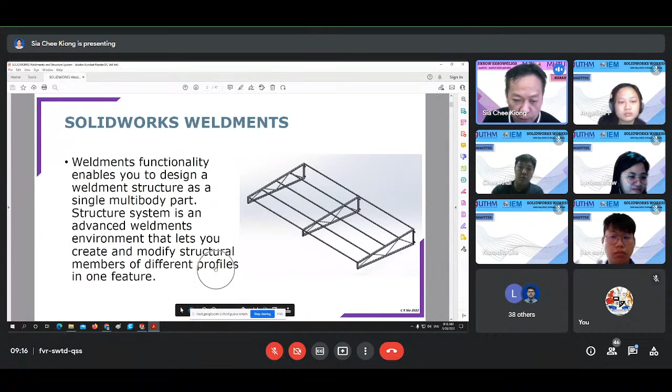So this is the project I mentioned just now. Instead of designing some things, we can come up with a cut list. I think this is very important for the procurement engineer, to list up or stock up all the necessary raw material for the project, maybe for early shipment before the project begins.

If you use this method step by step, I believe after you install your own SolidWorks, you can at least create something simple. So try to compact it down like this. So actually for the weldment step by step here, we will focus on this, which I circle with this red circle, focus at this 5 step.

For the weldment, we can create the cut list, which I mentioned earlier, and then we can estimate the weight of our products, since we assign the material for each product, which has properties like the density and the volume of material. Then we can come up with the overall weight estimation.

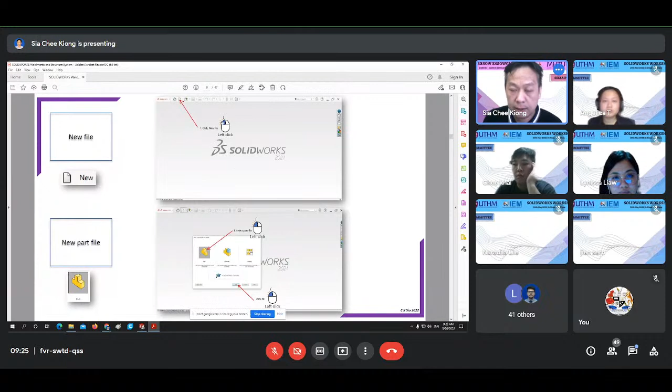I stated the steps clearly - even which key should you click? Should you click? Okay, which key should you click? So until now, we open the new file.

Take time to load. All right, okay, this is the environment of it.

Then we will start to sketch. We will sketch this profile, this line. We start to create this line over here, like this.

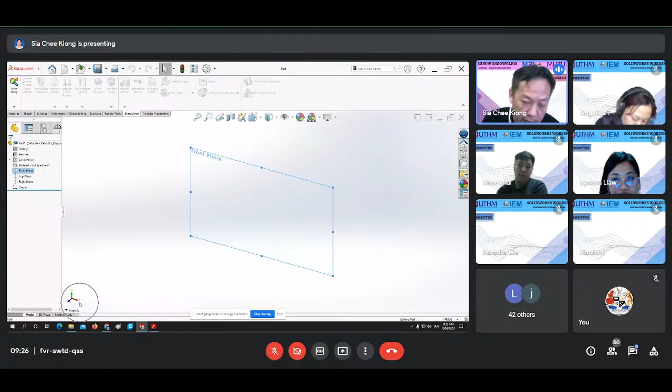So before we start with our sketch, I would like to let you know we only can sketch at the flat surface. The flat surface means either plane available here - you can sketch from the front plane. It's a flat surface because this plane is located parallel to the X and Y axis. Between X and Z axis, and for the right it's Y and Z axis like this.

So we will sketch this according to this dimension over here. So let's say if I want to start from the right plane, it's quite simple.

You just right click at any plane that you want. Let's say I want to sketch on the right plane here, I just right click. When you right click, two small windows will pop up like that - a smaller one and a bigger one. Ignore the bigger one, we focus on the smaller one here.

There are 4 toolbars available there. If you don't understand what a toolbar is, you can move your cursor to each toolbar and there are explanations about the toolbar. For example, I move it to here, it shows.

The first one is sketch, so we select sketch because we want to sketch on the right plane. When I click sketch, the orientation of our view, which was in isometric view, after I start our sketch, the right plane will turn normal to our screen to make it easier to sketch.

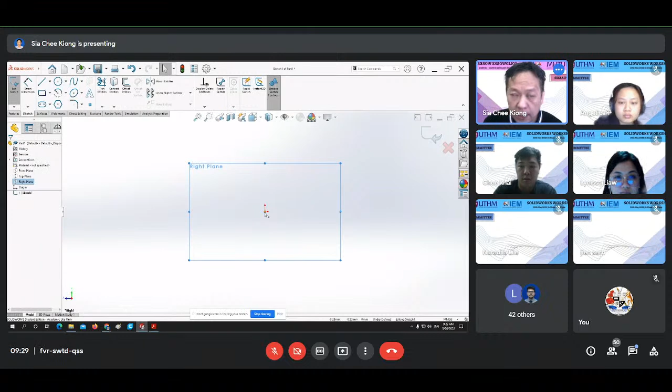So every time when you start with any sketch, I recommend you to start from origin. It doesn't matter which side you want to start. Why do I say that?

You can see, for example, if I create a circle, then I still can move my circle anywhere I want. I hold it and I can move it any way I want.

But let's say if I move my circle, and the center of the circle is located coincidentally on this vertex, that means my circle will stay there - it cannot be moved, but we can only change the size of it.

That's why every time you start your sketch, it's better to start from the origin. So we start this one. To sketch this one is quite simple, the method is very simple. This is a straight line, because I sketched it out using freehand, like a curve.

This is the command for the line. When I click this toolbar, but before I start, you can see the shape of my cursor. This is a normal cursor, white color, normal cursor. But when I activate this command, the line command, you can see the difference. My cursor turned into a pencil, and just below the pencil there's a straight line, meaning it's ready to sketch a straight line. We start it from the origin.

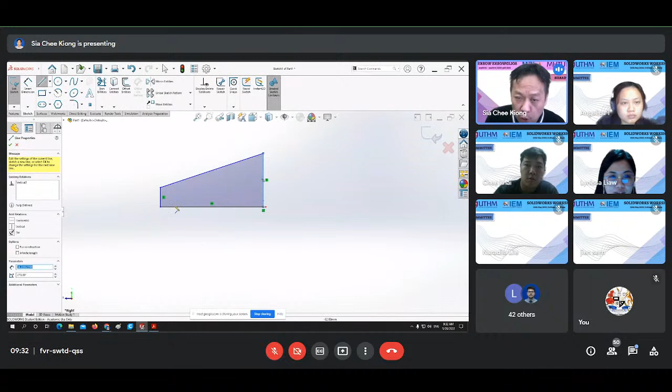Second click, third click, and cross the sketch, okay, like this. Very simple. After we finish with this geometry, this is the outside of our area. We can proceed with the inner line here. Please sketch it like this. Remember, just create the overall shape first.

It's so different, because there's no dimension yet. We haven't put any dimension. After we set the dimensions, then you can realize the real look of our design.

Okay, so until now we complete our geometry. This is actually the part for the awning, for the awning, this one.

After I finish with the geometry, the status of my sketch is still underdefined. Underdefined in SolidWorks means we can still move it, and we can still change the size or the shape. For example, when I hold this endpoint and drag it, the shape can still change. The reason it can change is because we lack something here, known as dimensions. We need to insert the dimension to make sure the status of our sketch is fully defined. Right now it's still underdefined.

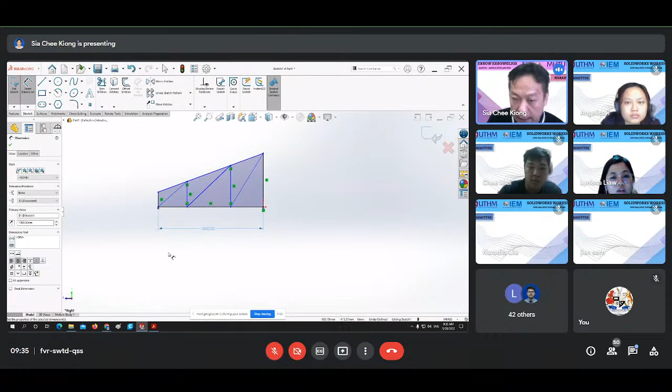Then I just change the value into our value, which is 1000, then we click OK. It's as simple as that. So currently, the length for this bottom line is 1000 millimeter, which is what we want.

Then the rule is simple. Every time when you insert the dimensions, I recommend you to insert the highest value first. For this case, the highest value is 1000, so I pick 1000. Of course, it's not written in any books, but this is based on my experience. Otherwise, the shape will change.

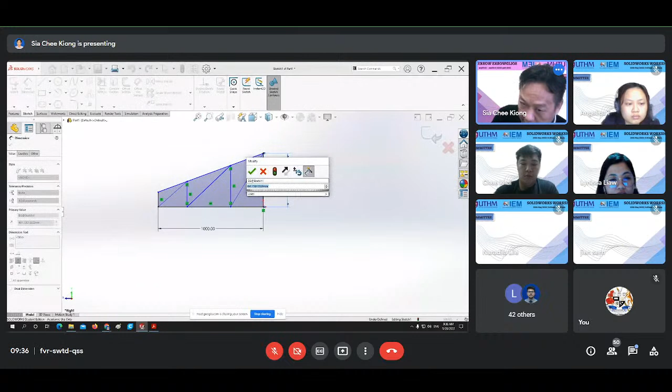Then the next one is 300 on this side. Very simple, we just change the value like that. And for this side it's 100. So click on the side, it's 100.

Okay, how about the inside? Just now I picked the line, meaning I measured the entire length of that line. How about the distance between this point and this point? We can do it easily. We can select the point that we want to measure. Let's say I want to measure here, and I click at another point that I want to measure, like this.

So this is how we do the dimensioning on this part. And the dimension is 320, we just change the value to 320 millimeter, like this.

Then we try to complete the sketch, try to complete the dimensions. This point to this point is 320. So when everything is ready, try to rearrange the dimensions.

It's very important, because people know whether your work is tidy or not. Try to arrange it. You can move the dimension anywhere you want actually, you can move it here or wherever. So try to arrange it like this.

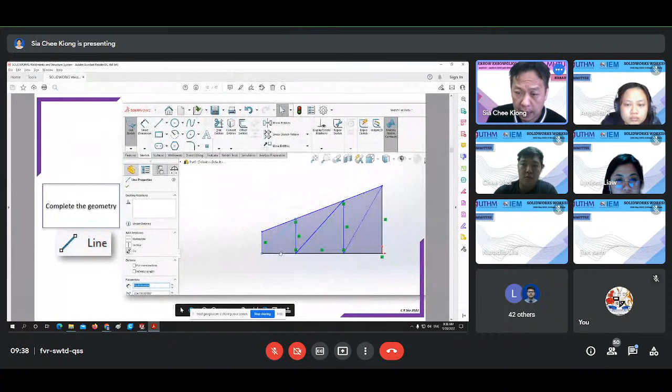After I complete with these dimensions, I will call out the Weldment tab. What is the Weldment tab? Let's say I cross this Weldment tab.

I cross this Weldment tab. Not all the tabs are available. So this is the tab that is available here.

Start with the features. This is what we call the tab, and this is the toolbar. For each tab, there's a different toolbar, for each tab there's a different toolbar. Okay, for SolidWorks.

Now we will play around with the Weldment tab, the Weldment situation. I'll show you how to call or add the toolbar for the tab for the Weldments.

Just select any tab here, any tab, and right click on it. Just right click on it.

And go to the tabs here and just check on any tabs that you want. So now we will run Weldment.

Check on the left side of this Weldment here. Then the Weldment will... here.

This is for the Weldment. So when I click on the Weldment, this is the home toolbar for the Weldment.

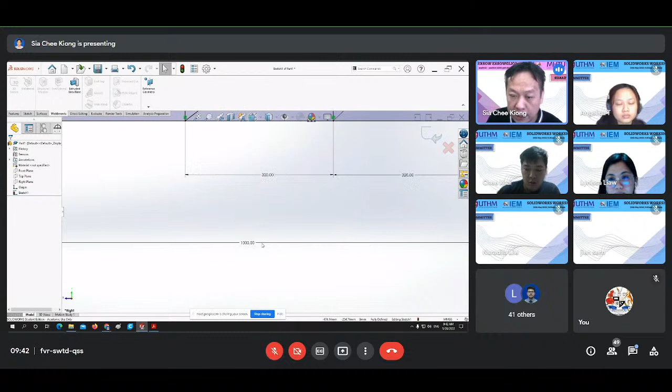But for my SolidWorks, I purposely set it to 2 decimal places, meaning the product I design is an accurate product.

So back to our standard here. Inside of this standard, this is the file for this standard here. See, we've got the C channel.

Check how the C channel looks like. And this is the S sections.

Angle iron, rectangular tubes, and square tube like this. And it's available in a lot, many dimensions, okay.

So for the civil engineer, maybe you need to determine the second moment of area for each structure here. But don't worry, because SolidWorks already calculates it for you.

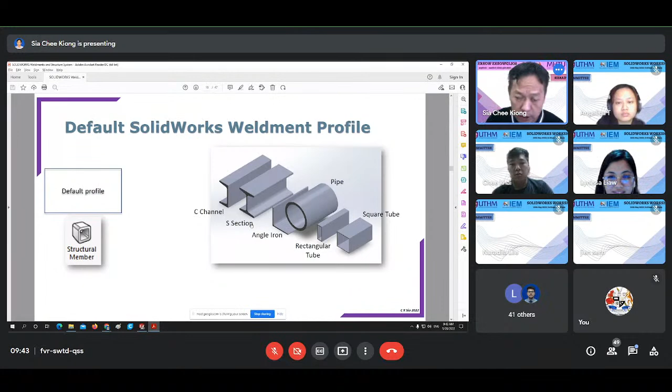For the electrical engineer, don't worry, because you can customize your own profile. Okay, maybe you want to create a 3D printer using a 3D printer, you can create your own structure, your own profile.

You can create your own profile like this. Or maybe if you want to create the rail for the movement of your motor, create your own. Customize your own profile - it's very common for you to create your own profile.

Not only the shape - I purposely created this shape like this because I don't want to take the shape of others. Maybe there's an issue of copyright, so I created my own part.

So this is the step of how we customize our profile. I will not go through this - I can simply go through this profile, so I'll just leave it as this one profile.

But if you follow this step, you can create your own profile. So continuing from that, we still use our example.

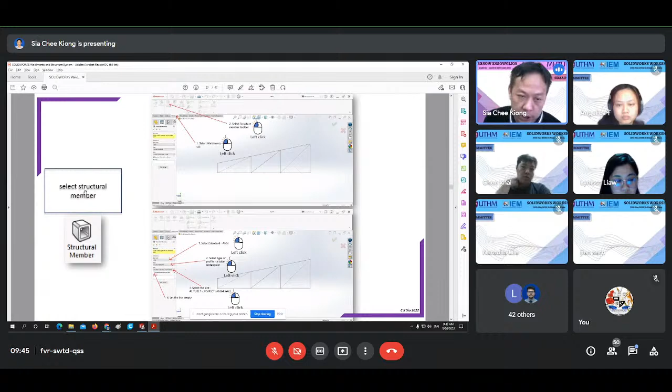Then the next one is we will select the structural member in our design just now. Our design,

we will design this part, which is created from the 1 inch by 0.5 inch rectangular tubes. So we will use this profile for this structure, and we follow the step.

Okay, so we go to the Weldment tabs. But before I can make sure this command is active, I need to cross out this sketch first by clicking this button here. When I click this button, the command for structural member will turn into an active command.

We start with the structural member. This is the structural member, and this is the properties manager for this structural member. Start with ANSI - this is the standard that I mentioned just now.

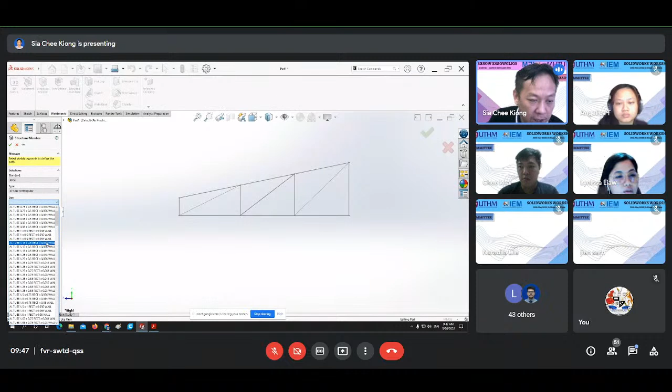The type is tube, rectangular tube, and the size is 1 inch times 0.5 inch. So rectangular, times 0.064 - this is the thickness of the wall.

So it's very easy to create structure. Even if this is your first time, maybe your first time exposed to SolidWorks, you can use this method. Very simple.

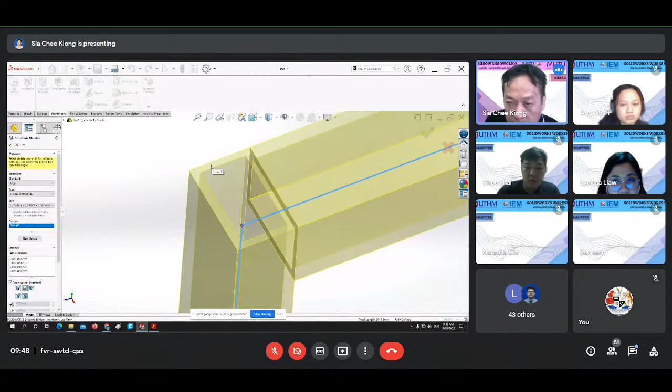After I select the desired profile, I just click the outside or outer line here. Click this line, this line, and this line. Then the line here will turn into the profile that we sketched and selected, which is the rectangular tube with dimensions of 1 inch times 0.5 inch, and the thickness of this wall is 0.064. So you can see how it looks like - it's very simple.

After we complete this, we need to create the second group - the new group. And we use the same profile, continuing to create the rest of the line here.

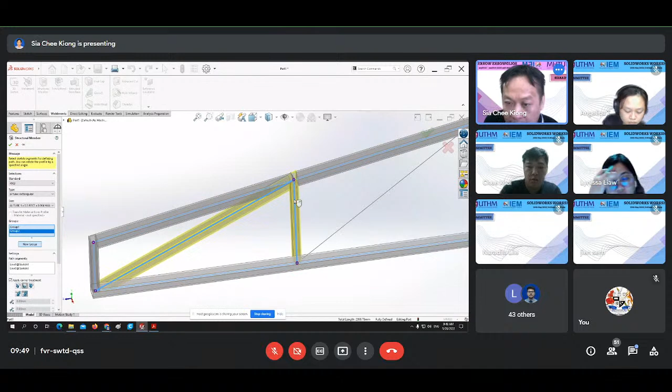Bear in mind, when you select the line, you must select it in sequence. You cannot select this one and then jump into another one, because when I click on it the profile will not appear here. You need to continue in sequence from here. Since the line is joined here, you can click this line and then the profile will show up.

Then select any line that joins this profile - select this line. I will try to complete the selections like this. When everything is ready, I can click OK here or OK over here.

So this is our overall structure. We can even view it in cross-section view, so I can see how the inner part looks like using this section view. It's very detailed.

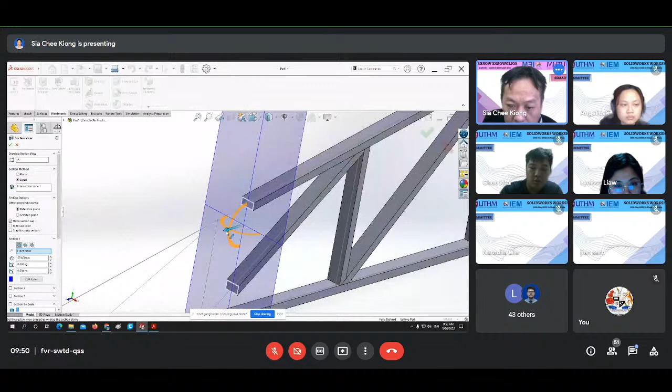Maybe I want to see the intersection between these three points - it looks like this. Simple. Pull it - okay.

But when we turn into the production process, we consider the material and the production process. For example, when you cut the corner here to look like this, maybe it's difficult compared to this line. You can pick any treatment or type of shape that you want, like this, or this, or this.

If you ask me, I will prefer the second one. Maybe this structure will have a better strength - this is my opinion.

If it's like this, there's an open hole, it's exposed. But for this one, it's still open but in the side way. This one, everything is closed - if water goes inside, there's no way for the water to go out. So I prefer this one.

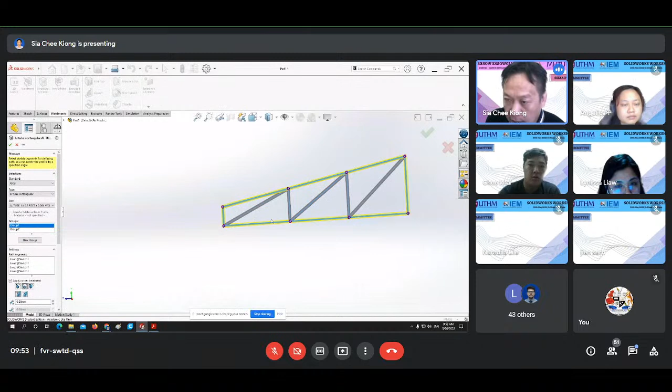Each dot represents the join between each structure. This purple dot here means it joins this structure to this structure. And this dot represents the join between this structure and even this structure as well - three structures joining into one point like this.

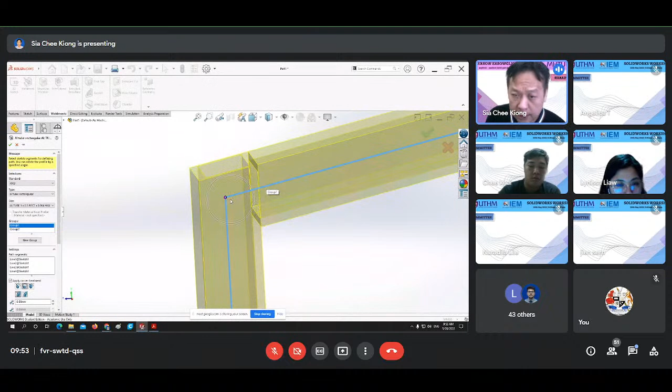So how can I change it? I just simply click at this dot or any location that I want to change. Just click on the dot and you can select the shape of corner that you want. For example, if I click the first one, it will change like this. The third one here will turn like this - it's very simple. So I want it to look like this, then I can click OK.

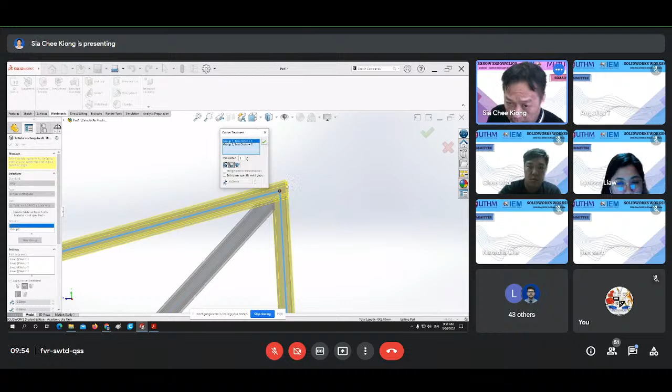Now, how about this one? This one is okay, but if I want to change it, I can. For example, I want to focus on this diagonal direction, which is this structure where we have come to here. Just change the trim order, and it will look like this. I think for this corner it's okay.

Like this. The last one, pick it and change it until it looks like this. So if the corner looks like this, it's easier for us to produce or cut the structure. The structure is easy to produce and easy to weld as well.

Okay, after everything is ready, we can click OK here. This is our structure. It's complete with the corner that we want.

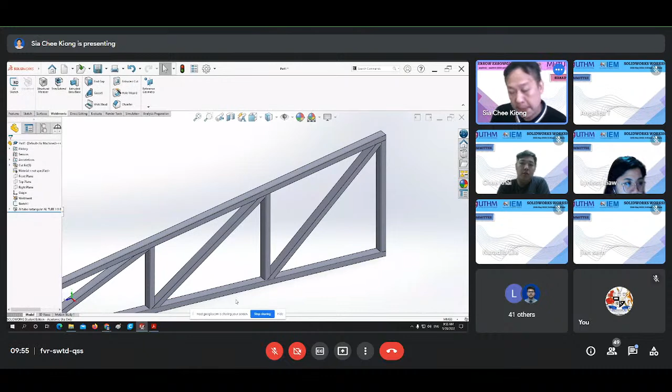Corner that we want. Maybe we can change here. Here, I am not happy with this joint. So click here, then I can order it like this. Okay, click here.

Yeah, like this is better. See? Better. Okay. This corner, okay, this corner is nice. This corner is not good, change it again.

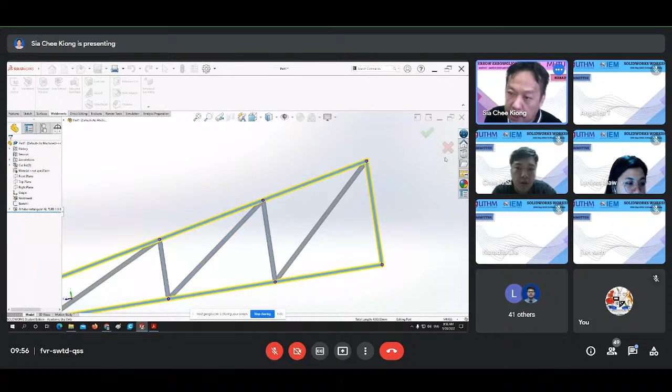You can change each corner, but it's okay, and this one is okay. When everything is ready, we can click OK, and our design looks nice.

So the next step, our structure is complete. Now our structure is complete. And of course, for this structure, we need to add an additional pad behind it, because we need to fasten this structure on the wall, on the concrete wall. We need to add an additional pad.

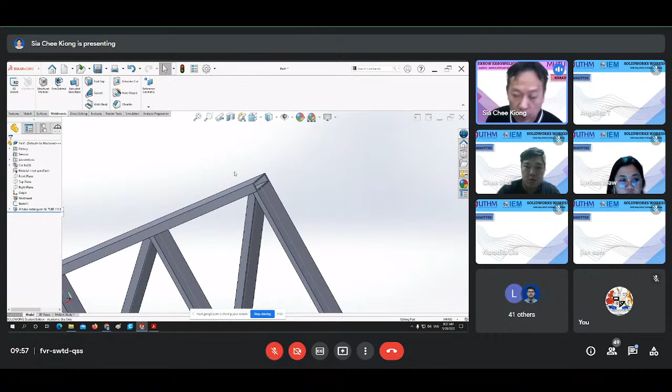So now we are not using this structural member or weldment approach. We will use the common SolidWorks 3D method to create the plate. I will create the plate with dimensions of 50 millimeters by 50 millimeters, and the thickness of the plate is, let's say, 5 millimeters.

So for your information, in SolidWorks we can sketch anything, but as I mentioned earlier, we need to sketch it on a flat surface, on a plane. Even we can sketch it on this surface, on this face.

Let's say if I want to sketch something on this surface, I just click on this face and select the sketch toolbar. This is the sketch toolbar, like this. If I want to sketch here, then I click, and you can sketch on this surface. Even we can sketch inside as well, everywhere, as long as the surface is flat.

Okay, so I'll try to sketch here. When I sketch, you can see the surface will hover to the screen to make it easier for us to sketch. Now the next step is simple.

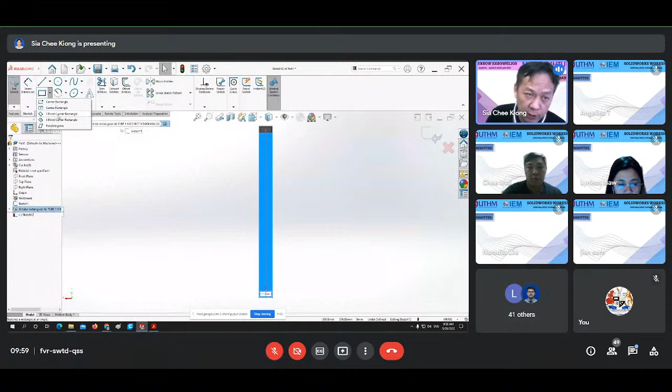I will use corner rectangle. Just now our sketch tool was line, but now I will be using corner rectangle. When you expand this command, there's a variety of commands for the rectangle, but I will use corner rectangle.

You can see the cursor looks like a pencil with the corner rectangle icon at the cursor. So I will sketch exactly on the edge of this surface. SolidWorks provides feedback when you move near any entities like a surface, edge, or vertex - it will auto-relate it to you.

Let's say I want to sketch it here. Fine, click it, and then drag it, like this. Okay, so after I create the geometry, then I need to insert the dimensions.

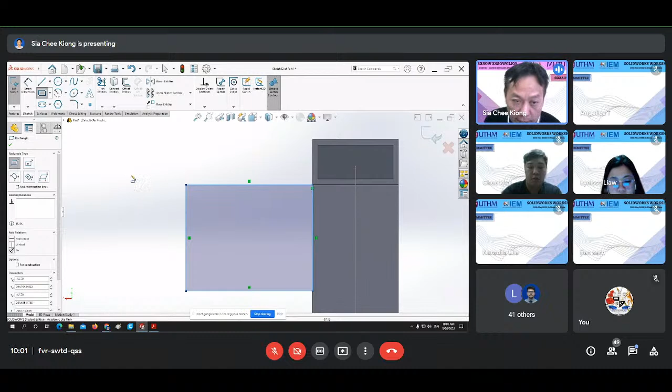If not, our status keeps underdefined. As I mentioned, the size is 50 by 50. To complete, I will try to sketch it at the top and the bottom like this. Oh yeah, before I forget, how I control this view - I just scroll my mouse up and down, so it will provide the magnification.

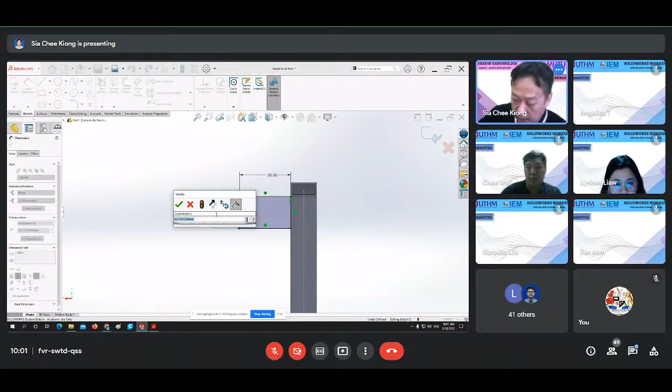Then I will insert the dimensions for each side. This is the command for smart dimensions. 50 and 50. And 50, and we try to complete for both rectangles - 50 and 50.

Okay, so we are complete now. We are fine because the status of our sketch is now fully defined.

Okay, proceed. But before I proceed, I need to create the hole for the wall plug. I draw a circle inside this rectangle for both rectangles. The size of the wall plug normally is a round number, like 10 millimeter or 12 millimeter in diameter.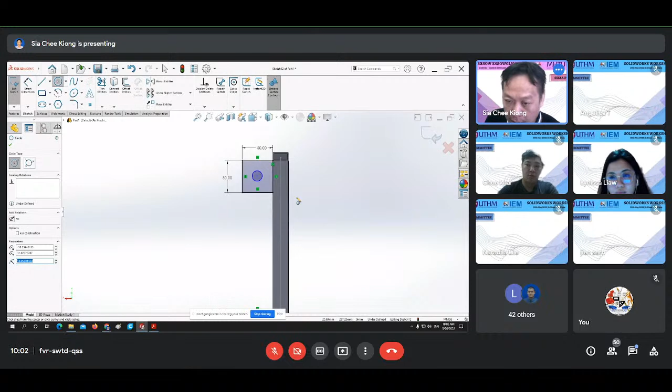So we try to give the dimension of the hole, let's say 10 millimeter. This is the size of the circle.

And if I want to locate the circle, I can use dimensions as well. Instead of sizing the circle, I can use dimensions to locate it. Currently our status is underdefined because we still can move the circle anywhere we want, even though it's stuck at 10 millimeter. It's movable, so we need to keep our circle fixed and locate it at the center of the rectangle using dimensions.

If I want to locate our circle at the center of this rectangle, the center should be located 25 millimeter, which is half of this dimension, from this edge. So I'll use this dimension to measure from this side to the center, like this, and change the value to 25 millimeter. And from the top to the center in this direction as well.

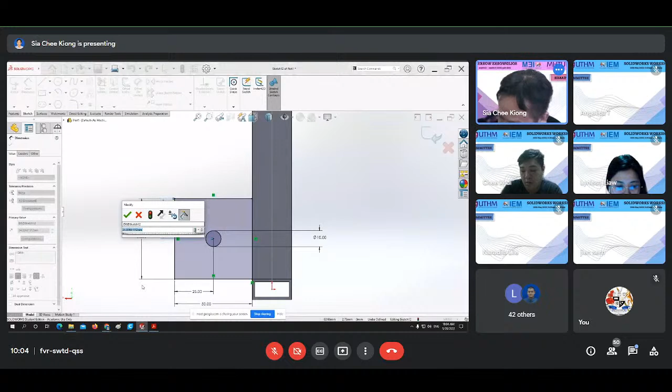Just now the color of the circle was blue, and it turned black after all the dimensions were complete. Still underdefined because we need to complete the same for another circle.

We'll do the same process. From the edge to the center, like this, 25 millimeter. And to the top, to the center, like this, also 25 millimeter. So when everything is ready, you can see it's complete with all the dimensions.

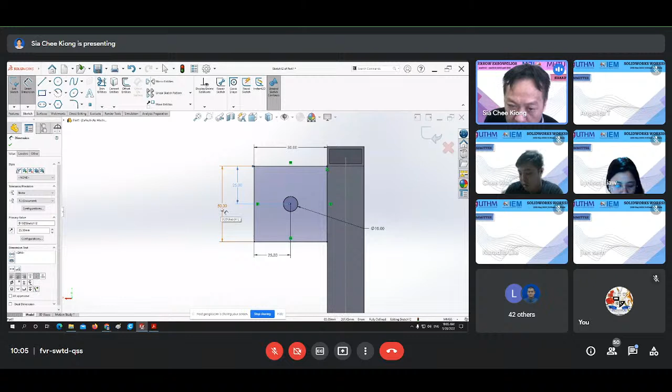As a reminder, you need to rearrange all the dimensions properly, so it's ready. Try to avoid any intersections between the dimensions - like this is not recommended, it's quite confusing. Make sure the shorter dimensions are located inside, meanwhile for the longer dimensions you put them outside like this. It's 10 millimeter, maybe here. Nice, okay, for this bottom one as well. Okay, fine.

This 10 millimeter, I can change the leader, like this. Okay.

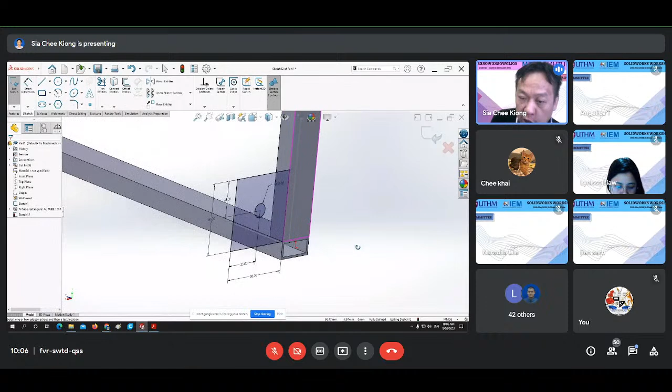So everything is complete, our status for this sketch is fully defined. But when I change the view, it's only a sketch, meaning there's no thickness at all. It's only a line for both circles, or for both geometries, like this. It's only a line, okay?

So we need to give a thickness for our sketch, which represents the plate that we want to create. To do that, we need to select the Features tab. The Features tab is normally used to create and edit the solid, create and edit the solid. So we try to give a thickness.

For the thickness, you can try to understand the shapes of the toolbar here. When you move over it, there are explanations - you can see the explanation, it even shows how to use this toolbar. For the revolve function, there's an explanation there too, showing the usage of this command. Very user-friendly actually, this software.

Okay, so we start with Extrude. When I click Extrude, you see the thickness for both sketches will appear. And what is the value of this thickness? Our aim is 5 millimeter, but currently by default it's 10 millimeter, so I need to change the value that we want, to 5 millimeter. Okay, now the thickness of our plate is 5 millimeter.

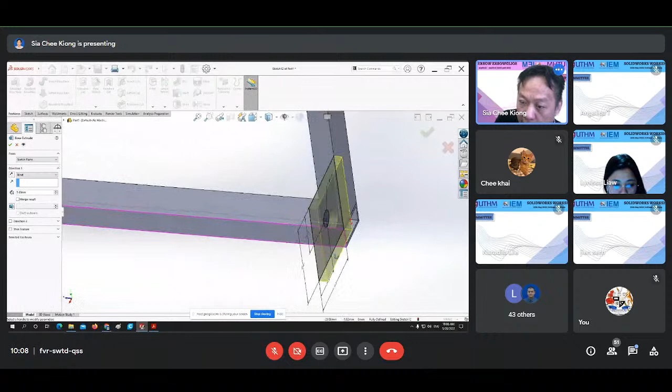But check the direction properly - if I turn it to look like this, the direction of the extrusion is opposite. We want the direction of the pull to the left, but now it's currently to the right. So what should we do? We just need to change the direction. I click this button to reverse the direction. It's very simple - when you click on this, it automatically turns into the opposite direction like this.

When you are ready, check again that our condition is fully defined, then you can click OK. This is the plate that we sketched. It's complete, it's complete, okay, it's complete.

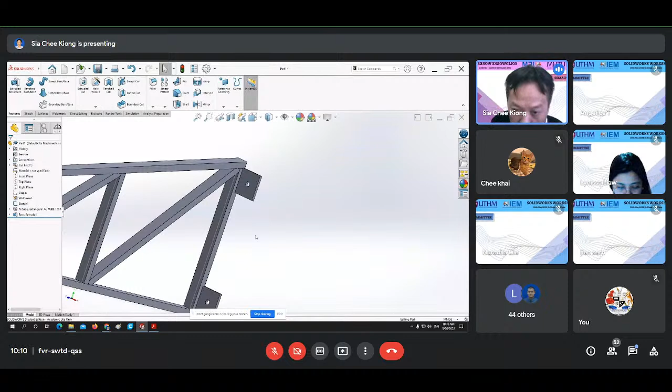Okay, then for the next step, I'll show you how to change the view into the standard view. Here are 3 methods available. The first method, you can use a keyboard. The second method is you can use the command, and the third one is a combination of the command and the keyboard. So we'll use the combination - hit the spacebar key on your keyboard.

This toolbar will show up, and this is the orientation that we can select, the view that we can select. This is the top view, front view, bottom view, and so on. This is the isometric view.

So like this, or you can use the command right here. Also the same, you can select it, any view that you want. Or you can use the shortcut key: Control 6, Control 7, Control 8, and so on. You can customize your own view, but I will not show you today how to do it.

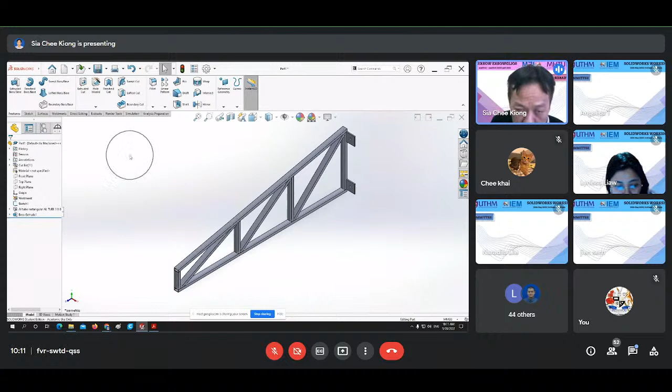When you scroll it, for example, when I locate my cursor here and scroll, it will move there. But when I locate my cursor here and scroll, it will move there. So if you get used to this mechanic, then you will be able to create the drawings easily and very fast.

When it's ready, we complete, and proceed with our next command, which is for information. Currently, we have not yet assigned any material for this structure. So try to assign the material, which is steel. I prefer to use this AISI 304 material.

To assign the material, you just need to go to FeatureManager Design Tree, and this is the material. Right click on this material and edit the material.

This is the material available in the database of SolidWorks. We have steel, irons, aluminium, copper, titanium, and so on. For the steel, we know it's a combination between iron and carbon, so we use this steel, and we use this AISI 304 material.

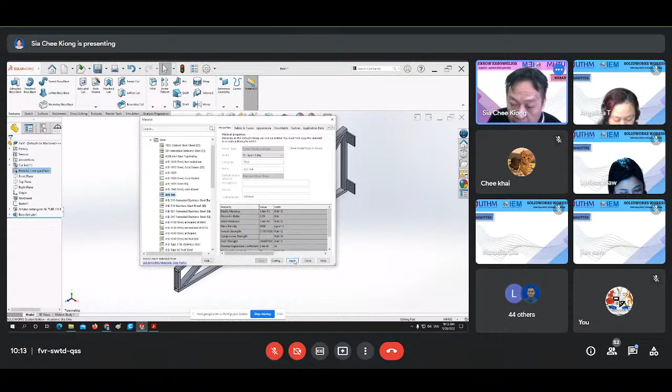Then you can just click apply, then you can close it. I'm not sure you realize it or not, but actually the color is changed. Just now the material was not specified; now it's turned into AISI 304. If you want to change the material, you can do the same process again. This is the example for the material.

After the material is complete, we will do the simulations. Since we have time, I will explain it more. For the simulation, it's simple. This is the tab for the simulations, this is the analysis. If it's not available in your computer, just right click and go to the toolbar tabs and select the simulations. Click on simulations.

We will start with a new study. Click on new study, and this is the studies that are available in SolidWorks. You can use statics, frequency, topology study, design study, thermal buckling, and so on. I'll use static.

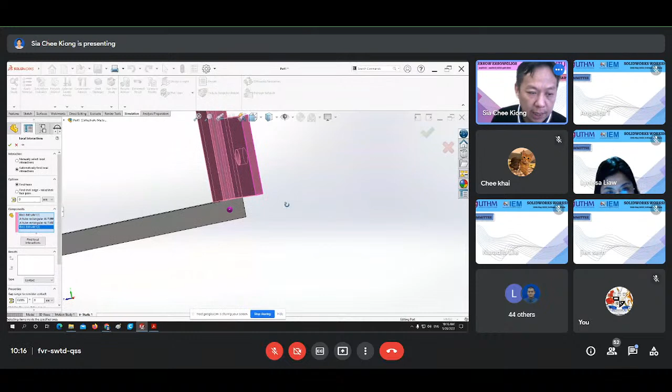Select all the necessary parts, and you can find local interactions. So there are in total 4 local interactions: the first one is between this surface and the inner surface of this one, the second one is here, and so on, you can see. After we set up these interactions, you can click OK for this interaction. If you want to create a selected local interaction, just click.

Okay, then we go to the next step. We call it fixture. Fixture is boundary condition, simple to say. I want to keep the bottom part and the rear part of the structure stick to the wall.

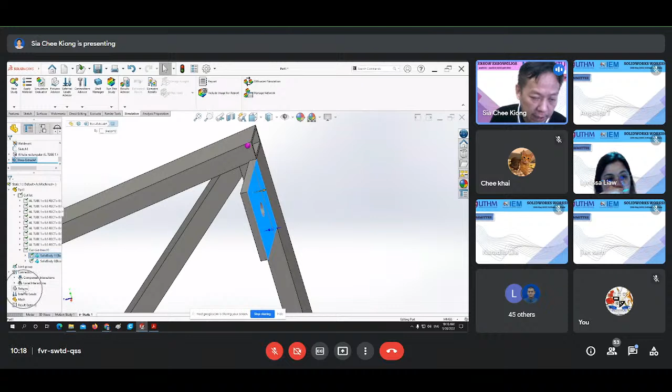I just select the connection with the fixture. Right click on the fixture, and I want to change it into fixed geometry, which means we cannot move it. Click on this surface and this face. This face is fixed because we stick it on the wall, attach it to the wall.

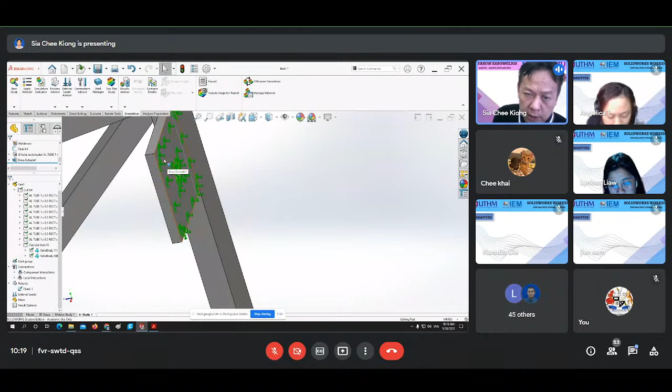When it's ready, then we can click OK. So we already assigned the interactions between the part and the fixture, which is this face is fixed. Means this face is we cannot move it.

Okay, the next one is the force. Normally it's located at the top of this structure, because we will add in the roof, or maybe you want to consider the extra load on it, you can simply create your own force. Okay, but how to do it is simple.

For the external load, just click on the force, and since this is the structure that we select, we can treat it as a beam. Take it as a beam and select the structure, not the surface.

Then we want to make sure the direction of the force. You can click spokes to select the directions. You can select the direction at any edge that's parallel to the y-axis, because the force is facing down. I click on this edge like this, facing down, and you can change the force.

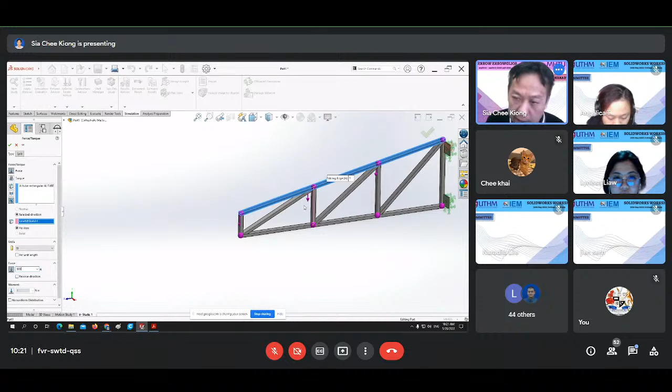Insert the force. Let's say I want this structure to hold up to 50 kilograms, about 500 Newtons. Then you can see the arrow facing downwards, which presents the direction of the force. But if you want to force the direction to the top, you can reverse it. This is the correct direction though. Then you can click OK.

Then the next step is we will mesh it. Mesh is finite elements - we will turn the analysis into n elements. We just right click on mesh and create mesh. Let's agree with it, okay. And this is our mesh.

After it's complete, we can run this study. It depends on the complexity of your study - the more complex, the longer it will take for SolidWorks to solve it for you. Since this is a simple structure, it's ready. It's complete.

So as an engineer, the first thing you want to make sure is our design is safe. Doesn't matter the amount or magnitude of stresses and the properties of the material - we are engineers, we need to focus on the safety.

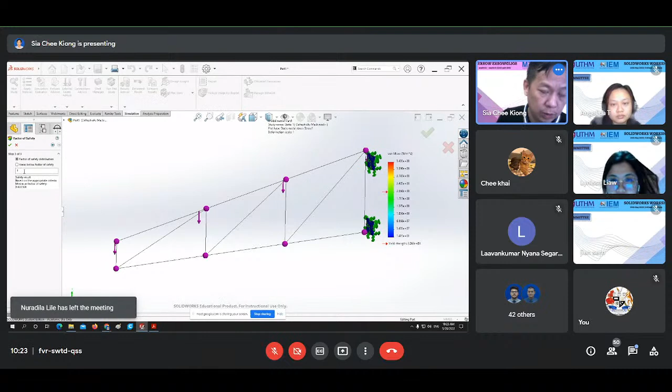So since the value is less than 1, means our structure has failed. So we need to redesign it again. And we change the force from 500 Newtons, maybe we change it to 250 Newtons. Change it, and we rerun the study.

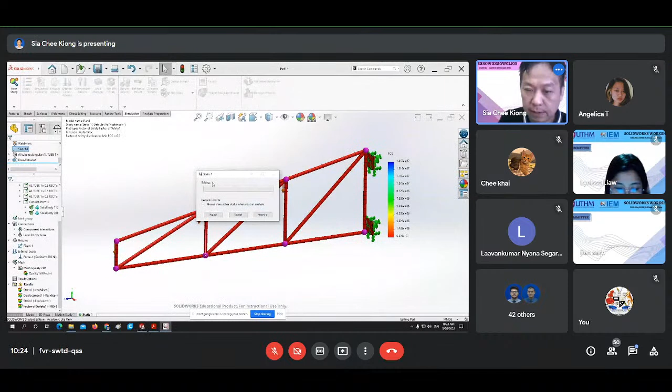Now we recheck again the structure, the results. Just double click on the result. Now our safety factor is improved.

After I change the material, our safety factor just now was 1.25. Now it's increased up to 3.1. Maybe I can increase the force again.

500 Newton, 500 Newton, I can recalculate again. Okay, 1.42. So 500 Newton - you cannot withstand 500 Newton. Maybe you can reduce it to 400 Newton. Okay, recalculate.

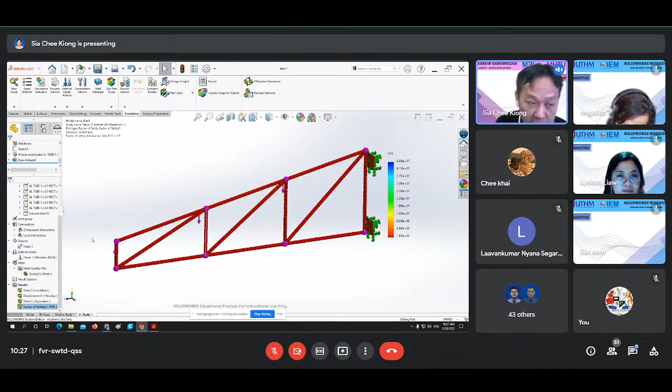And the material for this tube is AISI 1045 steel. And this is the conclusion for our analysis. So instead of factor of safety, we want to visualize how this part deforms.

We can try to focus. Okay, the red color deforms more. You can see this is the scale. Blue color means that for this part there's no deformation at all, but for the red color it's deformed more. Even we can animate, you can see how the deformations look like.

Okay, maybe I can increase the scale. Increase the scale. It's okay, it's okay. So for this contour of stress and deformations, we can improve our design as well.

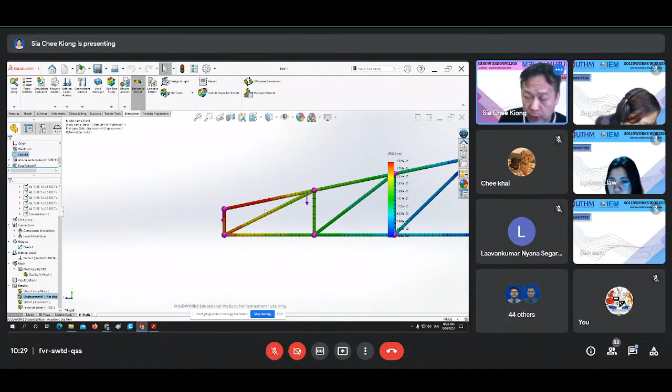For your information, the design work is iterated from the beginning and kept iterating until it's successful. This is the way how we get the analysis. But after everything is complete, we can turn our results into a report.

Just click at this report. Click this into a report. And even you can insert your name as designer - this is my name. Company can put any details available here, then can publish it into Microsoft Word.

It's easy for us to do a report on our design. Let's take time to generate our report.

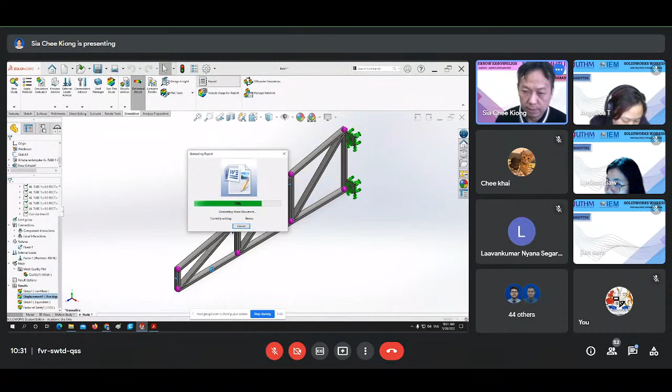After we complete our report, then maybe you need to edit something, because maybe the arrangement is different. So this is the product.

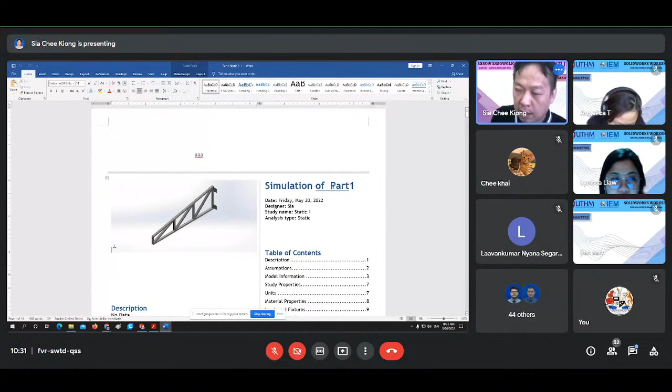This should be the company name at the top here. This is the simulation of part one - part one is the name of my product. I haven't given it a name yet, really. I need to save it and give it a name.

With that, the designer and type of study, and then complete with the table of content. And this is how we allocate the constraints, and it's quite detailed for the report.

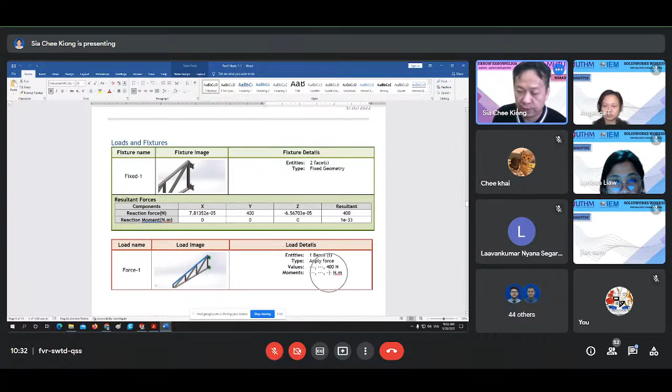For the report it's quite detailed. Even the value for the force, and the resultant force that reacts. And the beam force as well, and the results for each study that we did just now.

So like this, it's the result that's available. Okay, this is for the report.

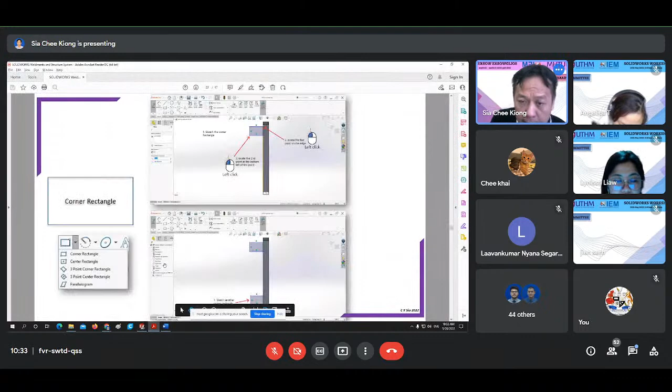Then the next one is - okay, we still have time, so I will go to the next one here. We will visualize it, render our products here. For rendering, the model is our product, and I will visualize it.

How to visualize it? Go to render tools, and just click at final render. Final render, and you can save the file in JPEG format or any photo format. Final render takes time, and this also depends on the performance of the computer, especially the graphic card.

For the render, actually you can add in the shadows or the background or anything like that. It's not nice, this one.

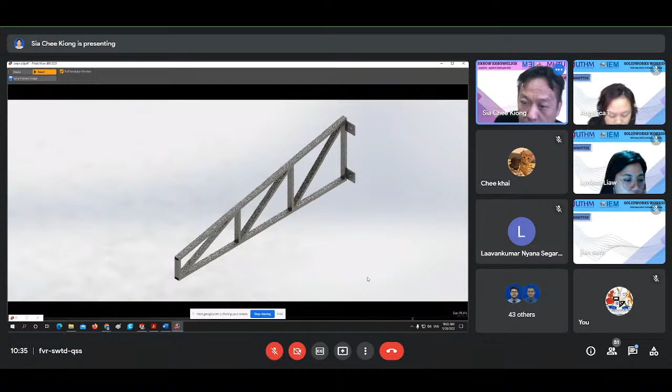Let's say we are finished, then you can save the image. You can save the image, and finally we have our product. So the next one is the drawings.

The drawings - since we have time, I'll show you how to convert our product into drawings. The first step is I need to save it, save file, so you put it at desktop.

Example for - yes, okay. So I open a new file, call it drawings. The drawing file - I will turn our model into a piece of paper.

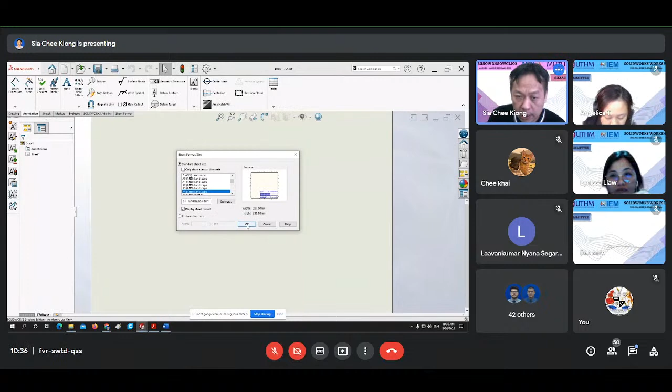So I can select the block title that's available here. Let's say I use this A4 landscape format. Okay, this is the format that's available.

And then insert the part here - this is the part. And we put it in isometric view like this. Too small, then I can change, scale it up.

Scale it up, 1 to 20 or whatever you want, 1 to 12, control the scale that you want. 1 to 4 - it's too big. 1 to 8 should be nice like this. Okay, like this.

After it's complete, you can move and arrange the part wherever you want. And then this drawing - not so important. The most important is the table.

Get the bill of material for this part. Click on it. Okay, so this is available.

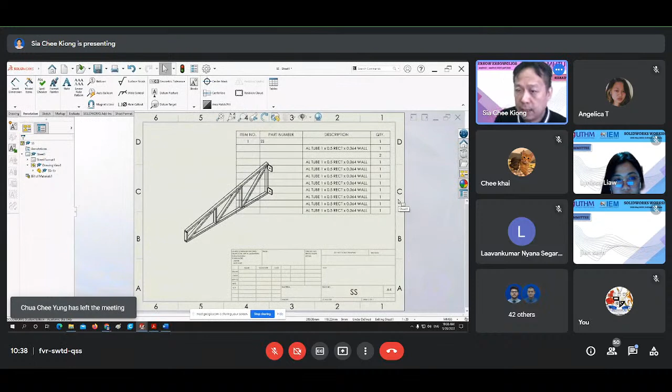And maybe this one can be deleted - part number, can remove this part number to the unit of measurements. Okay, so you can change it.

Maybe cut list properties - the length, get the length. That is the length, you can provide the length for each material. Arrange it.

That one, I think something wrong. I cannot drag it. I can now. Okay, drag it to the side, and even I can auto balloon on this part. Item number, length - wait, I need to change something here.

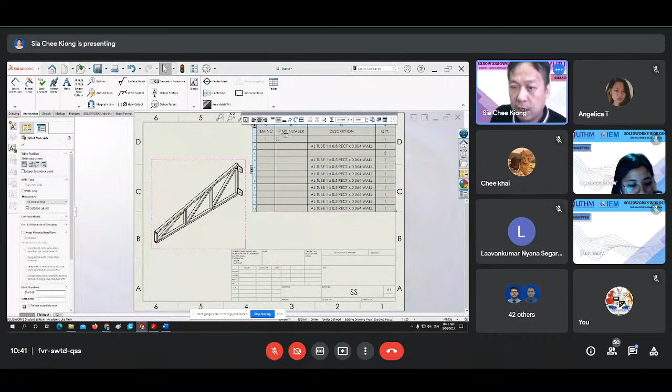Okay, this is the best table you can provide for this cut list. So maybe you can change this one to the length, to the units, these properties, and the length. The information here is quite important.

So that when you give these drawings to our warehouse to do it in-house, then they will use this measurement to provide the raw material. Okay, this is the bill of material.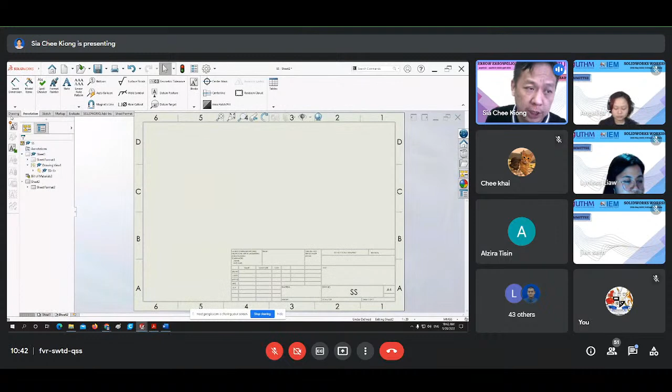Second drawing is the dimensions. Object drawings - view it from the side. From the side like this. Okay, from the side like this.

And then you can change the scale. 1 to 8 now is nice, like this. Okay, then you can insert the dimension.

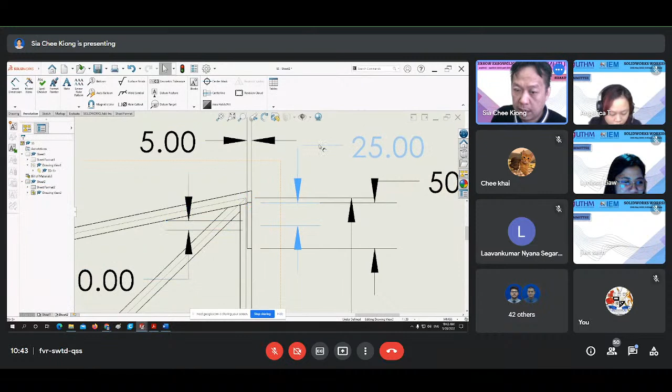Okay, so maybe for these dimensions, this one is equal to this one. You need to rearrange the dimensions properly, in a proper manner.

Or if you don't want all in one view, you can project it to another view. Project it to this side, like this. Okay, this is the side.

Then you can move the dimensions from here to here. And you can delete this dimension. This dimension also, you can move it to here. Okay, and you can delete these dimensions and rearrange the dimensions properly like this.

Rearrange the dimension like this. This one, you can move it to here as well. You can delete these dimensions. Okay, this one also.

This direction. Okay, 25, move it to here. Okay, arrange it like this. And we remove the unnecessary dimensions.

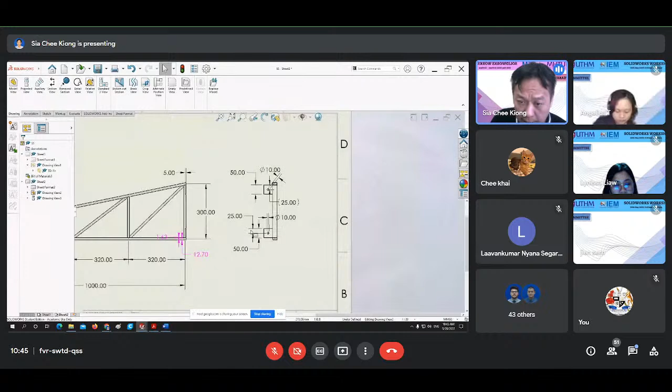When everything is ready, then you can give a name on the view - for example, this is maybe the side view, so that we know the sequence of the view. So rearrange the dimension.

Like this. Okay, maybe you can change these dimensions like this, it's better. This one also, change it. Okay, this. Okay. Okay, okay.

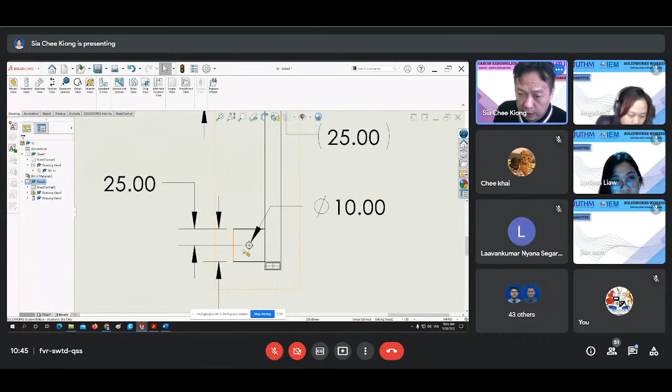Okay, but if this view is too crowded, we can use the additional detail view, and maybe if some things cannot see inside, then we can change it to another display style. Maybe this hidden line visible.

But for this structure, since it's very big, I think for this, hidden line remove is sufficient for our design. Okay, this one, just remove this one. Okay, this is our drawing.

Second drawing - so the measurements is here, and overall view of the products is here. They will cut the length according to this here, and they will fabricate these frames according to this design here.

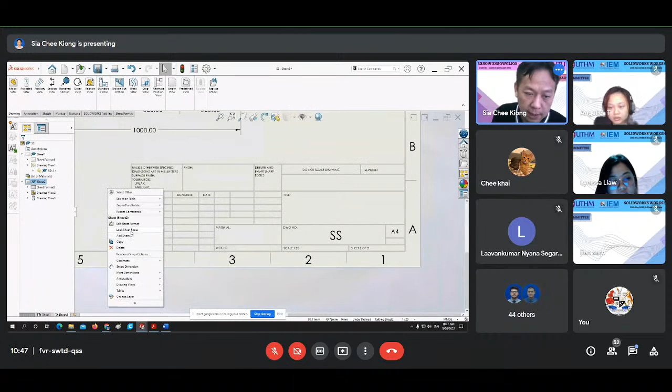Design here. Okay, then you can change the information here - edit format with all the necessary name, title, material, and the person who draws, person who approves. And this is the manufacturer. Even the quality department will need to fill up this information here.

Okay, this is all about the drawings over here, very much. Okay, so any format that you want, maybe save it in PDF format. Okay, save it in PDF format.

Let's see the outcome. Format on the desktop. Okay, this is the outcome of our drawings.

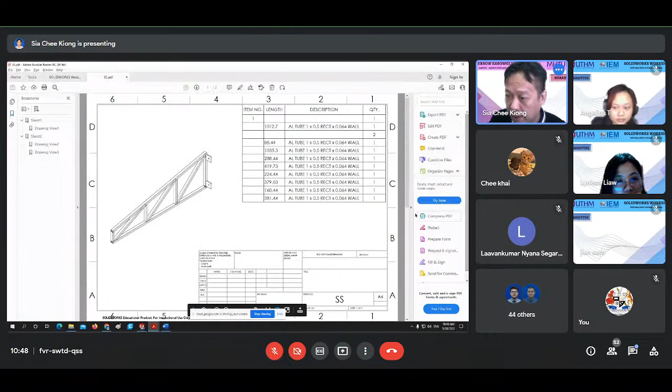Okay, this is what you should know because you are the future engineer. Okay, I think drawing is very important. Okay, we cannot disagree.

The young engineers nowadays, it's quite weak - they cannot even read the drawings properly. So I hope this brief explanation about the drawings might give you an idea how to develop the drawings from the product that you create.

So next is the weight estimation, the mass estimation. During my consultancy work attached to the company, some companies required the weight estimation of the material, because from this weight estimation they can estimate the cost of the project. The cost of the project normally is the weight of the metal multiplied with some weightage to get the cost estimation of the project.

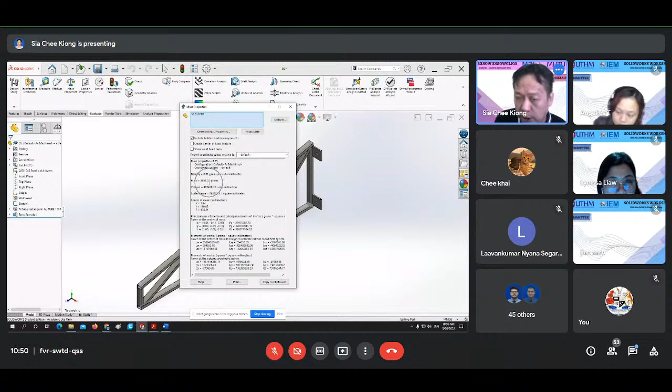So overall weight is 3.6 kilograms for this product. Of course, this product cannot be a standard single piece. Any questions? No? Okay, so we can multiply the products into a set.

You will see what happens, because this is the structure of the awning. The structure of awnings cannot exist in one piece like this. You must have a pair, more than 1 — let's say it's this. To multiply the number of this structure, we can use the mirror command and the linear pattern command to multiply the number of this part.

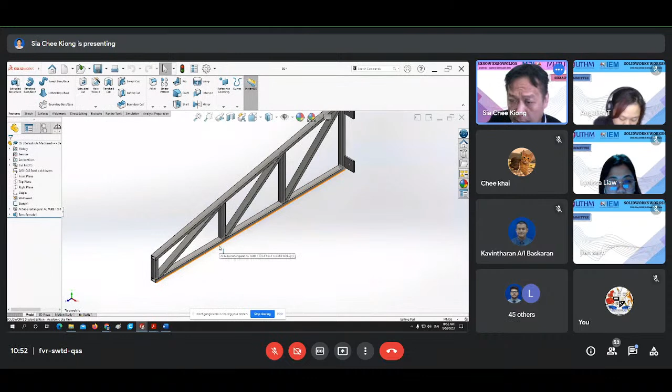The most simple way is to mirror it, because the direction of the support here is facing inside. To mirror, you need to insert a plane to mirror. Let's say the left side and the right side of this structure are separated at 2 meters length, 1.5 meters, 1 meter. Then the plane that you need to refer to is half of it.

So you try to insert the first reference geometry plane, and we can set this plane — let's say it's 500. Okay, we will mirror this part to this side, which is this plane number 2, the face of mirror.

Mirror, under the Feature tab. The face of mirror is clearly stated here — you just need to select this plane. Then for the bodies to mirror, click this, or the best way is to select all of it.

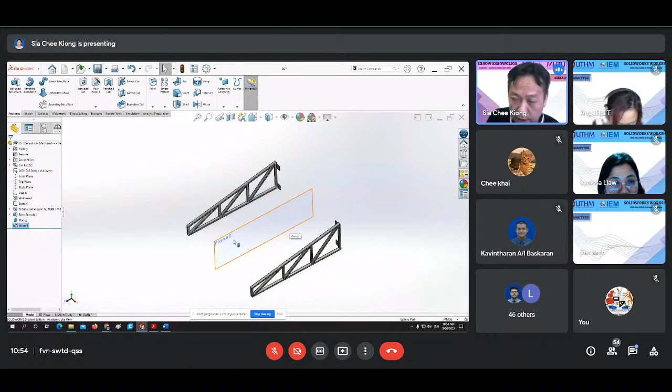Select all of it like this, include this one, okay, this one. Okay, then like this — now we have a pair of the structure. And then, if this plane number 2 is annoying, I think...

So now we can have the additional part here. Of course, with the additional part here, the mass is different — it's doubled up from 3.6, now turned into 7.3 kilograms.

Really, our analysis just now is quite good, because the 400 newtons we only considered for one side, but if we consider for 2 sides, maybe the load will be divided — maybe not equally — but at least some of the force will transfer to this side like this.

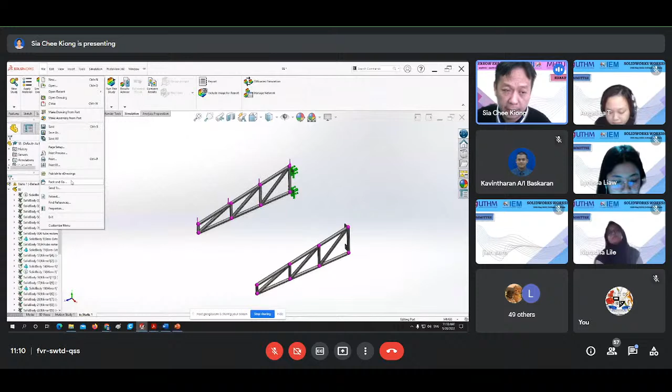Let me show you how to use Pack and Go. Can I share my screen? Pack and Go is here. For this file, for example, just go to File and Pack and Go. With Pack and Go, you can save all the components, including the simulation results, and you can choose any folder that you want to save it to.

Okay, am I answering your question?

Yes, it works. So for our last question: where can I register for CSWP certification and how much does it cost? If you sit the exam by yourself outside, it costs about $99 US dollars. But if you join our programs, if you only sit for the exam, it costs 120 ringgit. But if you want to attend the complete course, it takes 600 ringgit Malaysia. So I recommend you learn by yourself first.

After you improve your skill, then you can join the cheaper version at 120 ringgit. Don't worry, even at 120 ringgit you can still sit for the exam. Normally for the retest, we give you the opportunity to retest one time for free.